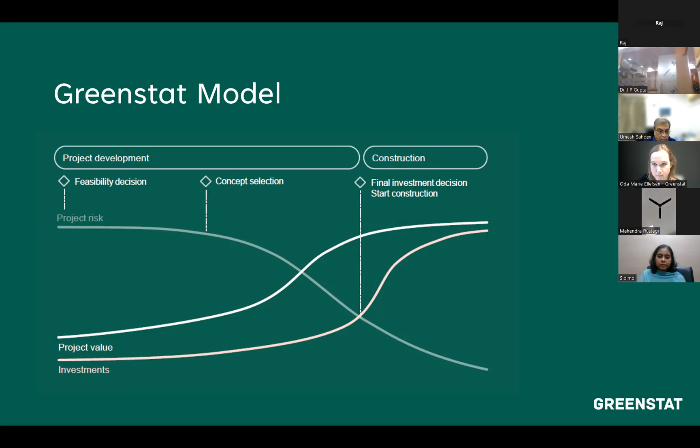So this is the model that we work with, and we have a project development cycle, which is divided in different stages that we go through.

And obviously the first stage is the feasibility study that we can do for our own projects, and we can do for others,

depending on the project. So each project phase is ended with a decision gate, essentially, where we try to identify the highest risk and decide on whether to move on further.

So that's a brief intro, and then let's go right into what we require to build a green hydrogen project.

And in the simplest sort of form, all we need is water, renewable energy, an electrolyzer, and a hydrogen consumer. And the fundamentals need to be in place.

There's no way around it. We have to look at our renewable energy availability - we'll get back to that a little bit later. The type of energy source that we have. We have to look at our water availability and quality.

There's no way around it. If you're going to produce hydrogen through electrolysis, you're going to need water and electricity.

And then we have to look at the different options for electrolysis. So that's the technology, the efficiency that we get, what kind of maturity the technology has, the reliability,

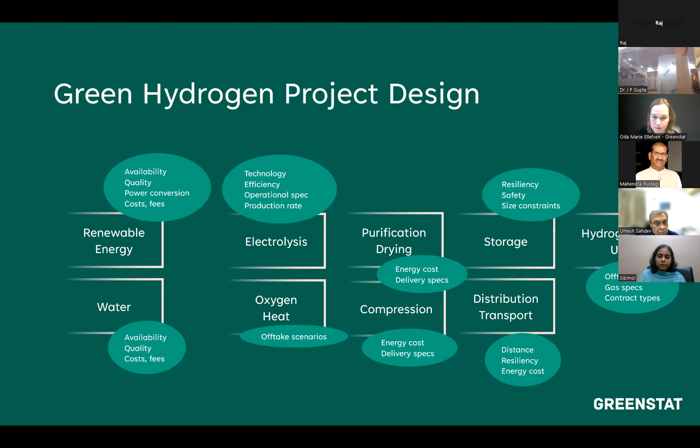So this is just an overview, and I want to spend some time on this because it's often not discussed, because we often think of the hydrogen plant as only an electrolyzer, and I want to illustrate how many components are actually required to get a functional plant.

In addition to the electrolyzer system, we have the civil works, the buildings, lights, access roads, offices, and we need to balance the plant with water, nitrogen, compressors, storage, and we often have an overarching control system in the form of an energy management system that might also wrap up the renewable energy production if we're doing an integrated project.

And inside the electrolyzer system, we have the electrolyzer itself, which includes the stack, the balance of the stack, gas liquid separators and connectors. We have power electronics like rectifiers, transformers, and we have the balance of the system with gas and water purification, and the electrolyzer PLC or control system.

An industrial plant might actually have several stacks or electrolyzer units, or even full systems, because there are some benefits to having several smaller systems instead of one large one, especially if you're scaling up production from a small initial project phase until full-scale production comes in later. That's why you often see phase-wise build out, but that's obviously more costly because you have to balance the plant even when it's small. So it's important to keep in mind and important to understand if you're designing a hydrogen plant.

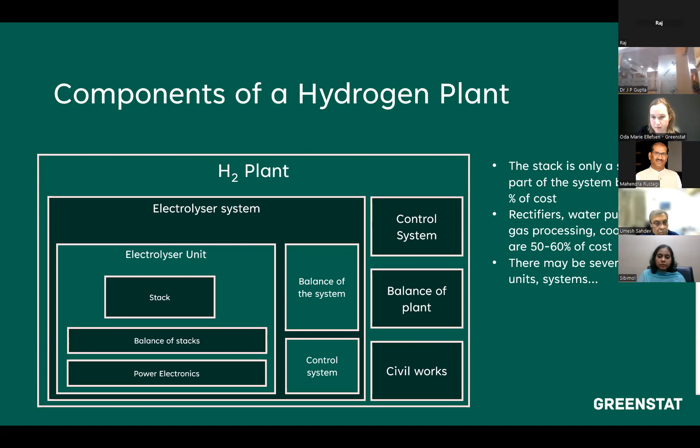I mentioned power availability, and especially in countries like India and Sri Lanka, I want to illustrate the difference between a project there versus a project in Norway. In Norway, we generally have renewable energy available through the grid. We have massive amounts of hydropower, which gives us renewable energy availability of 100%, essentially. That's more complicated than that, but that's what we operate with.

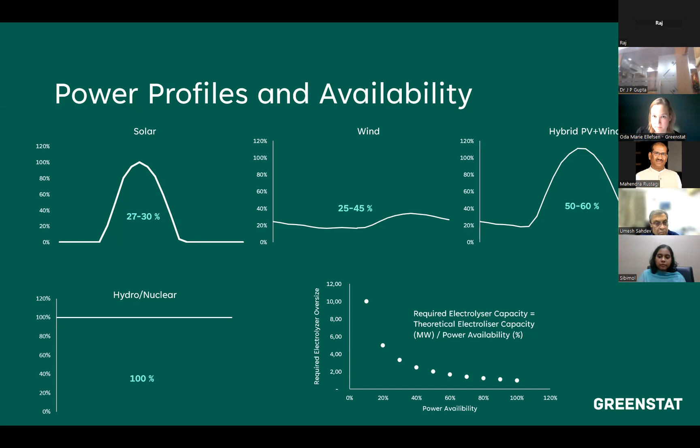However, if you're producing hydrogen from solar or wind or a hybrid plant, you have to consider what your availability will be, and that's going to dictate what your required electrolyzer capacity will be. Because when you don't have power, you don't produce. For solar, that's basically when the sun goes down until it comes back up again. For wind, it will vary greatly throughout the day, and if you combine the two, you might improve your availability, but it's a little bit more unpredictable. So this is going to be your main input for dimensioning your electrolyzer system. Just some rules of thumb.

You need 2.5 megawatts of electrolyzer to produce 1 ton per day of hydrogen if you have 100% renewable energy availability. So if you're going to produce 10 tons per day of hydrogen and you have 100% renewable energy availability, you need 25 megawatts of electrolyzer, in general. However, if you only have 25% available renewable energy during the day, you multiply that by 4. So essentially, your oversize factor is 1 divided by 25%, which is 4. And then you get 100 megawatts of electrolysis.

And you need to store the excess. If you're going to supply hydrogen at a constant flow rate, you're going to have to store your hydrogen, actually 8 tons of hydrogen, in order to supply at a constant rate. So this is a very simple calculation to estimate the size of your system.

Actually, the optimal solution in terms of cost might be a lot more complex. I'm not going to go into all the details, but a lot of our time is spent trying to dimension the renewable energy and the hydrogen production versus the demand, and how much you can fail on delivery in order to get your optimal cost of hydrogen.

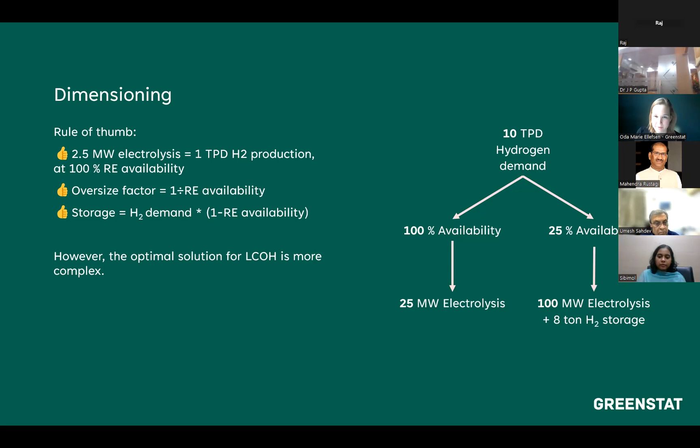And LCOH, I'll spend some time with that as well, because in a sea of acronyms, this might be one of the most important ones. LCOH stands for levelized cost of hydrogen, and it's a way of measuring the cost of producing hydrogen over the entire life cycle of the project, from the initial stage of production to where it's used. It takes into account all the expenses involved, the cost of setting up and operating the equipment, the cost of resources like electricity and water, and all the maintenance costs as well. So it's a way to give an understanding of the expenses involved in producing hydrogen, and it gives us the ability to compare with the cost of

other production methods. So here we see in the figure that the LCOH will vary according to the electricity price, obviously, because it's our main input, and also with the type of electrolyzer we choose. Currently, alkaline might be the cheapest. However, there are options to use SOEC, though it's not fully mature, and PEM is quite a bit more expensive. This also shows that the cost of these technologies is trending downwards. We are seeing some reduced cost, well, we will see some reduced cost on the capex side of the equation, which will give us a lower LCOH as we go into 2030, 2040, and 2050.

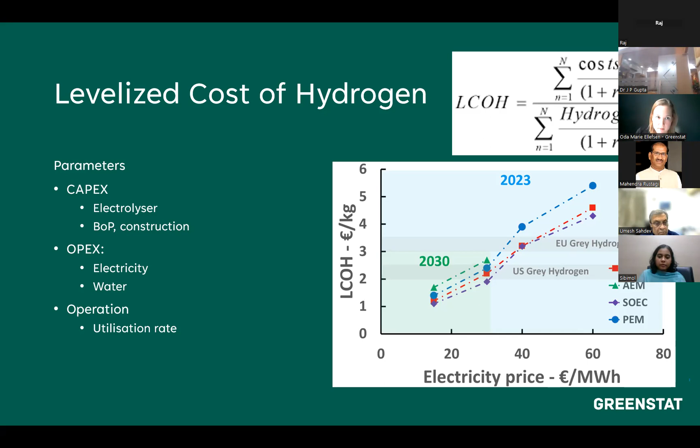This promise, this $1 per kilo in a decade, is something that's been mentioned both in the US and in India as a target for green hydrogen. I want to discuss this with you as probably a good target to have, if you think about the fact that green hydrogen is called to replace current uses of fossil hydrogen, mainly used in fertilizers and oil refining, but it's also a solution where electrification is difficult. That's steel production, long haul trucking, shipping, aviation, and there's quite a lot of debate on how much green hydrogen will actually be needed. But that's more complicated to discuss here.

What we really need to do is try and compare the cost of green hydrogen compared to the cost of gray hydrogen, and that can vary depending on where in the world you are. In the US and in China, fossil hydrogen might cost about $1.5 per kilo, and in Europe it might be closer to $2.5 per kilo. It depends on the cost of natural gas, and it's not a constant number.

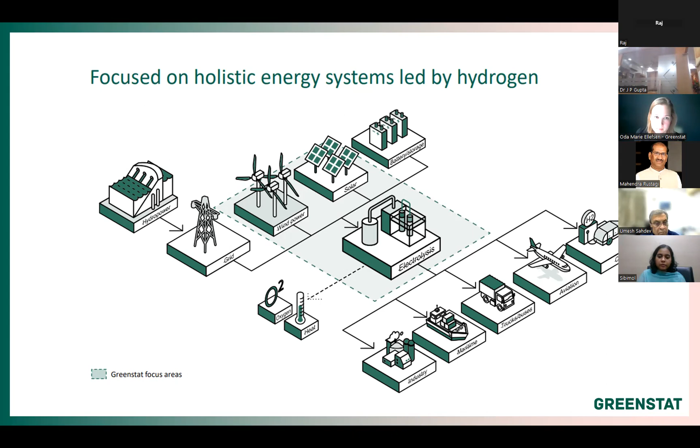I'll show you how that works here. So I chose three projects that I think are interesting enough and different enough for you to get an idea of the different solutions and different scenarios that we work with. And these are all from Norway.

First up is Stord Hydrogen. It's a small pilot plant, which is grid connected, and it's in operation. It started operation in May this year, and it can produce about 400 kilos of hydrogen per day. It is operated and majority owned by HYDS, Hydrogen Solutions, and Greenstat and Altec are co-owners. We were part of designing and developing this project. The hydrogen here is produced and supplied to the next door neighbor, which is the Sustainable Energy Catapult Center. They test different fuel cells and different hydrogen engines that we've discussed for research purposes and for different clients in Norway. We can also supply compressed hydrogen in containers, to basically any application, but generally the maritime, construction, energy, or transport sector. So that's Stord Hydrogen, and it's in operation. It's working. So we're proud to talk about this.

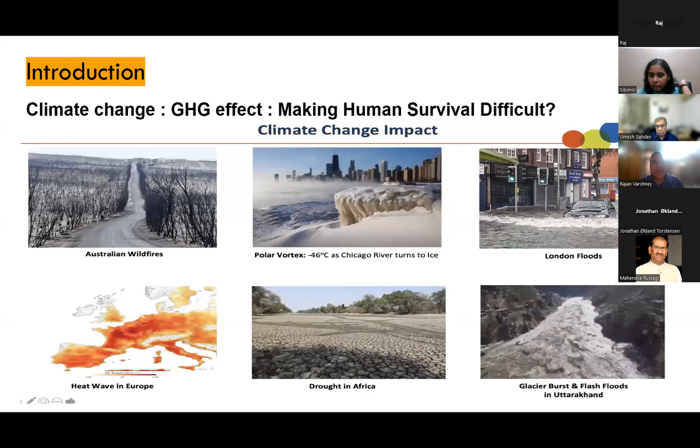Some issues or counter effects may be there. So if we use waste towards production of hydrogen, or even if we do electrolysis, we do certain innovations to reduce the GHG emission and use the heat value. This is the basic premise, slightly different from what you've heard till now. I am covering this area, mainly concentrating on hydrogen from waste and other newer techniques. We all know the GHG effects are very disturbing for India.

Our top 15 cities out of the world's top 20 polluted cities are there. If we don't use this opportunity, when India and Sri Lanka have a lot of development to take place in the next 30, 40, 50 years -- whatever we have done is hardly 10% of the capacities we require later -- so if we change our methods towards cleaner energy usage and cleaner production methods, it is a great opportunity.

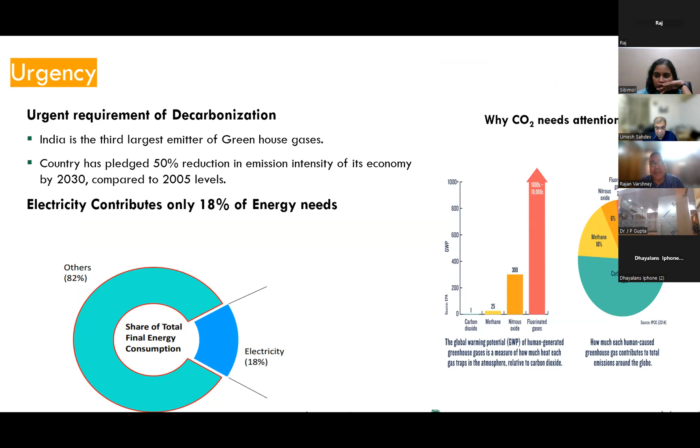Not only electricity, but fuel, transportation, and feedstocks all have to be changed, because electricity contributes only 18% of the energy need. Even if you make it totally green, a lot of other things are still to be made green. But waste is already accumulated in our landfill sites across the world, and people are worried how to control and eliminate it. Hydrogen presents a very good opportunity that I am covering now.

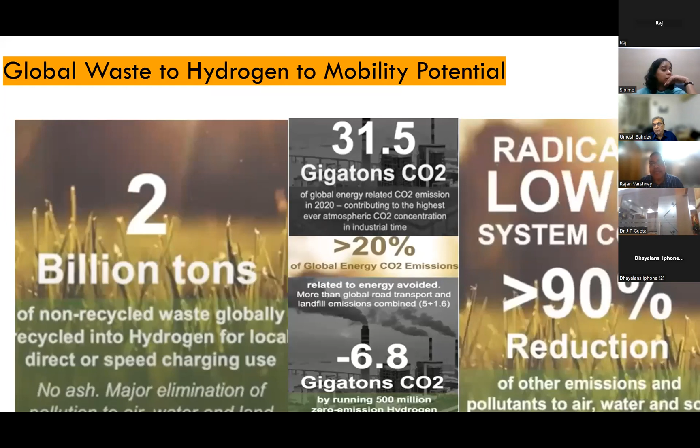We can even use agroforestry, Napier grass, and other things which can be grown in areas that are not fertile or don't have much water. Plus, if we use this biomass as well as agro waste, municipal solid waste, animal dung, sludge, sewage sludge, poultry waste, agroforestry -- there is a tremendous amount of waste available and we have to use it.

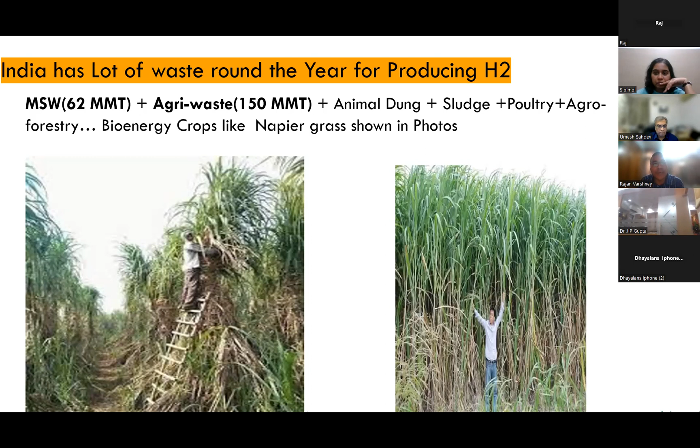We have seen in the Tokyo Olympics, China Winter Olympics, and further coming games, that a lot of hydrogen usage is there -- vehicles, cooking, heating, cooling, everything can be done. Electricity can be done through hydrogen.

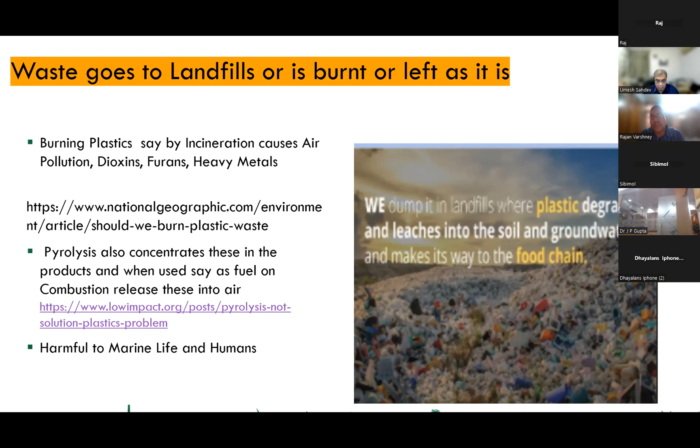Burning waste or leaving it as it is not an alternative, because if you leave the waste as it is, it liberates methane, which is 84 times more potent than CO2 as a GHG gas. So we have to rather utilize that methane and convert it into hydrogen, or use it as methane itself, but somehow convert it to CO2, which is much less potent, or even capture that CO2 which gets produced and make it into other fuels by reacting with hydrogen produced by us.

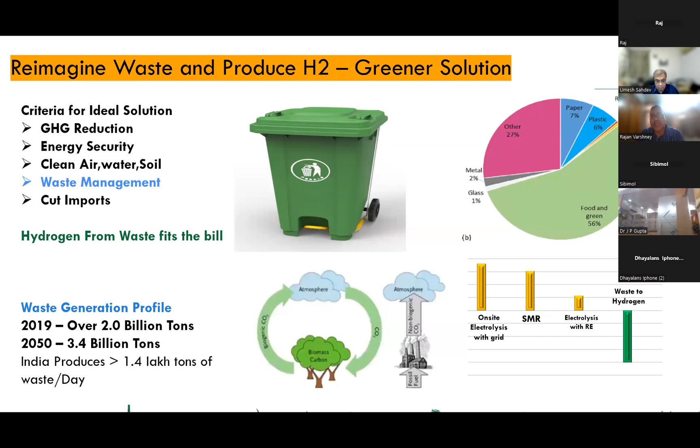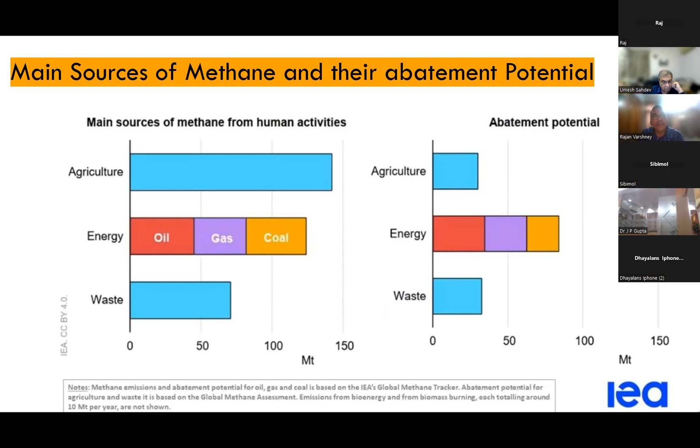Various companies across the world have different technologies, some with small plants, some with big plants. Like Pennsaco, USA, has a small decentralized hydrogen production plant. TRI USA has a 500 TPD biomass processing plant that converts it into SAF. It first converts it to syngas, then can convert it to anything -- SAF will be produced shortly, and hydrogen syngas can be used to make hydrogen easily. Several other companies are there which I have listed.

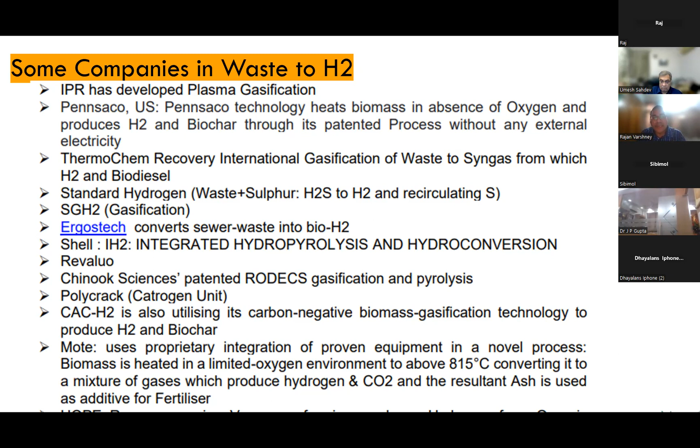The advantage of this Pennsaco pyrolysis process is that it generates biochar. If we mix this biochar into the soil, we can really further suck more CO2 from the atmosphere, and the process is highly carbon negative. First, we have produced hydrogen, which is saving us GHG emissions. Then this biochar, as a soil amendment, helps in absorbing carbon, and moreover soil fertility increases, so less amount of fertilizers are required. Fertilizers again require ammonia, and ammonia requires nitrogen and hydrogen.

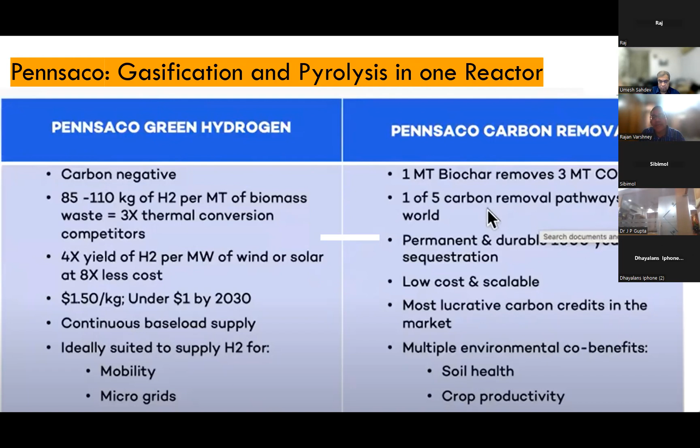So there is a lot of synergy. If we use waste properly, we can reduce our energy requirements ultimately, and the requirement for using fertilizers for production.

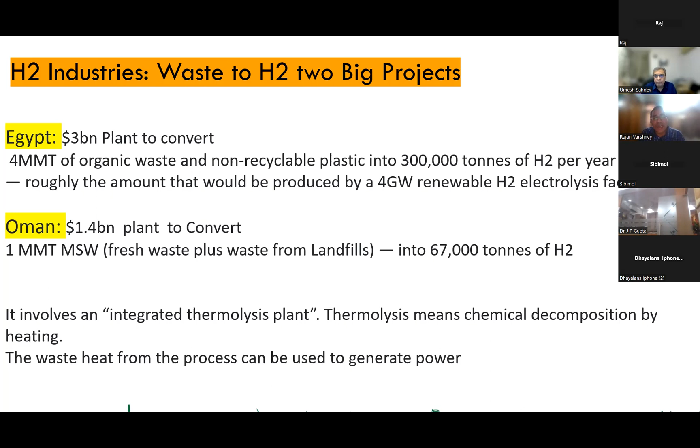Similarly, many companies are like H2 Industries, having a 3 billion dollar plant for converting 4 MMT of organic waste and plastics into hydrogen. Oman has a plant of H2 Industries for 1 MMT MSW input. They use integrated thermolysis. Then SGH2 has a plant with plasma gasification.

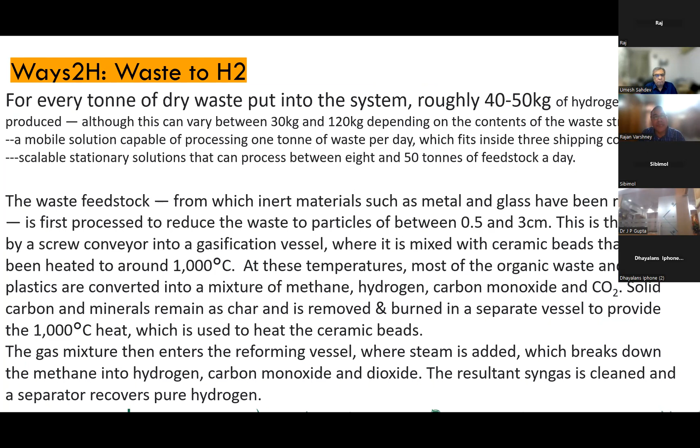Ways2H is again having a technology, and they have collaborated in India also with one company.

Then Waste2HHO, this is like we are converting water into brown gas. This HHO is called brown gas. Instead of making hydrogen, which takes in a lot of electricity, here very little electricity is required and a lot more energy is produced.

This is an example of an Indian company where glass is produced in Bharuch, Gujarat. They have reduced their natural gas consumption by 14%, and whatever addition they did very recently was done around the first quarter of this May only.

Only 6 months have passed, and expected ROI is 24 months. Brown gas has better combustion efficiency and aids more complete fuel consumption, so emissions are reduced. If we compare, for 1 kilowatt hour of electricity around 860 kilocalories of heat, we are getting HHO, which is giving us 50,000 kilocalories of corresponding fuel.

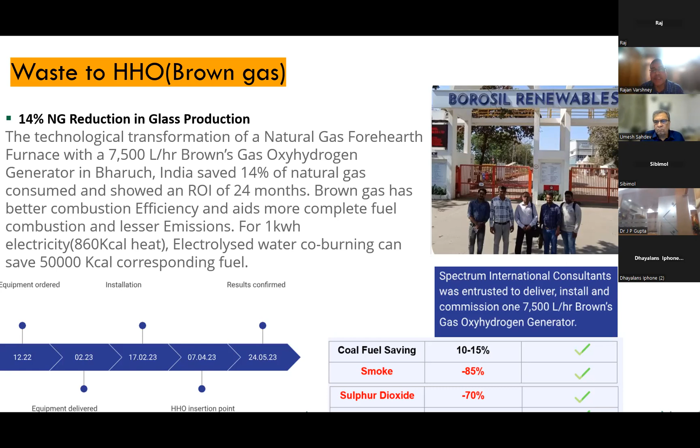They employed Spectrum International consultants to deliver this system, and the fuel saving was 15%, smoke reduction 85%, sulfur dioxide reduction 70%. So we have to use technology in such a way that we reduce our fuel consumption and simultaneously reduce our emissions.

When brown gas is consumed, it is like HHO - protium, like an electron is taken into the valence shell of oxygen from the hydrogen. It has 2 hydrogen atoms, so it becomes protons, and the electron goes into an oxygen shell. So when it gets combined into hydrogen again, into water again, a lot of energy is released.

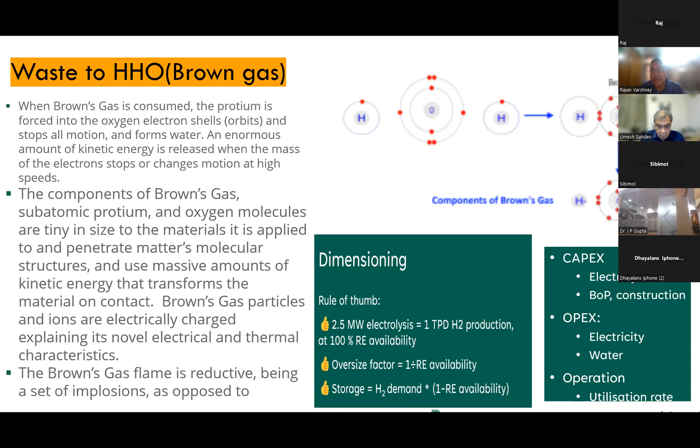With respect to electrolyzers, there is a lot of capex, opex, and their CUF. If we use renewable electricity, which is available only around 20-30% of the time of the day, a lot more electrolyzer capacity can be saved if we use waste or use innovative techniques.

In electrolyzers also, new electrolyzers are coming up, like Advanced Ionics having a Symbiotic electrolyzer, which will use 35 kilowatt hours of energy for 1 kg of hydrogen. That is 35 units of electricity for 1 kg of hydrogen.

It is using an SOEC process, the same that Bloom is using, but Bloom is at a high temperature. This has a temperature of hardly 150 degrees centigrade, so it requires lesser electricity also. This is the advantage here.

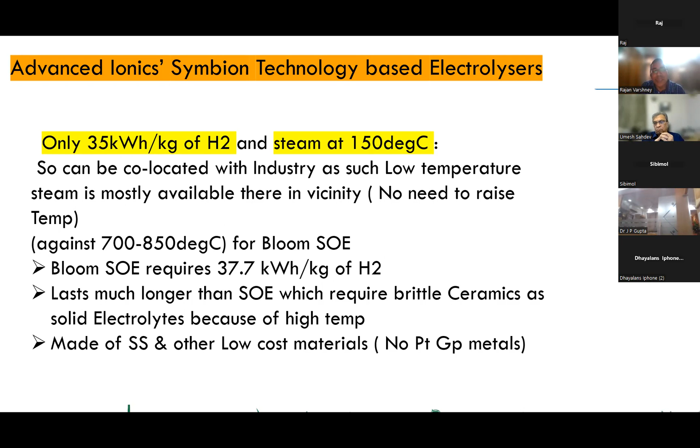And it doesn't use any platinum group metals. Mostly it is made of stainless steel and low cost materials. It doesn't use ceramic also.

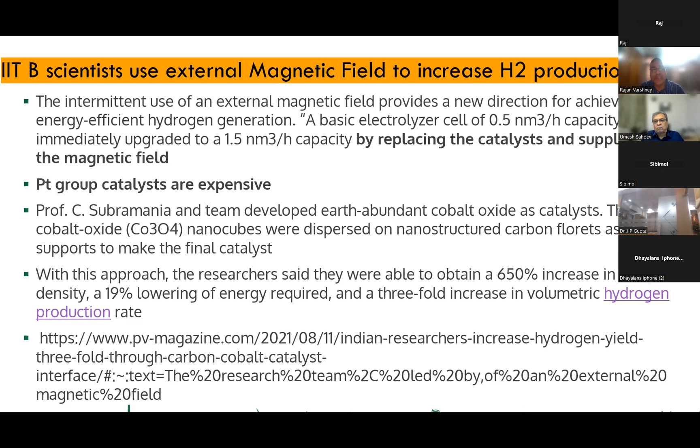Similarly, IIT Bombay scientists have used external magnetism to reduce electricity consumption and thereby increase hydrogen production.

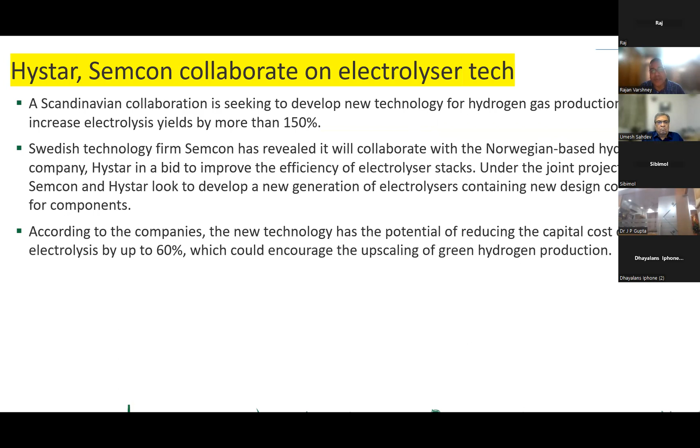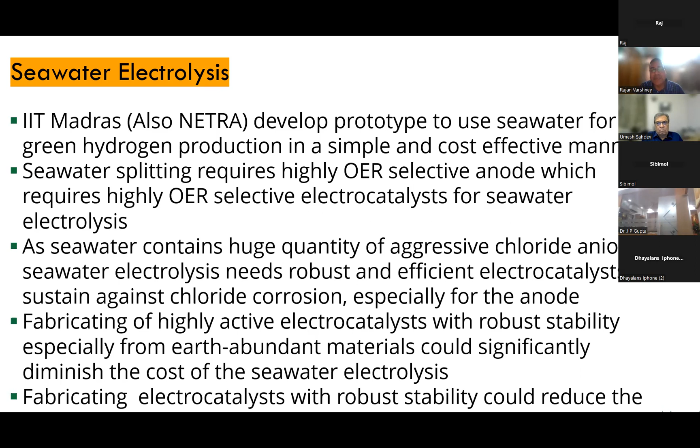Then there are methods to use seawater or even sewage water. AEM electrolyzers don't use platinum group metals. They can be easily made robust to use this water directly.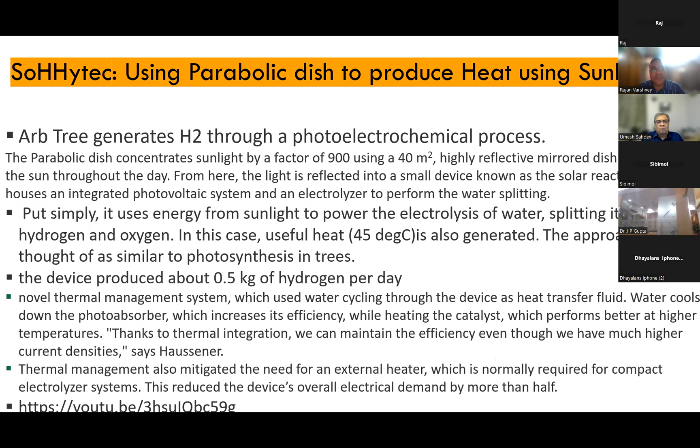Then SoHHytec is a European company which has an electrolyzer inbuilt in a big dish. This is a Swiss-based company, and they are building electrolyzers which are called big dish.

They have a system in which the CPV, called concentrated PV, converts electricity at very high temperature, but it has very high efficiency.

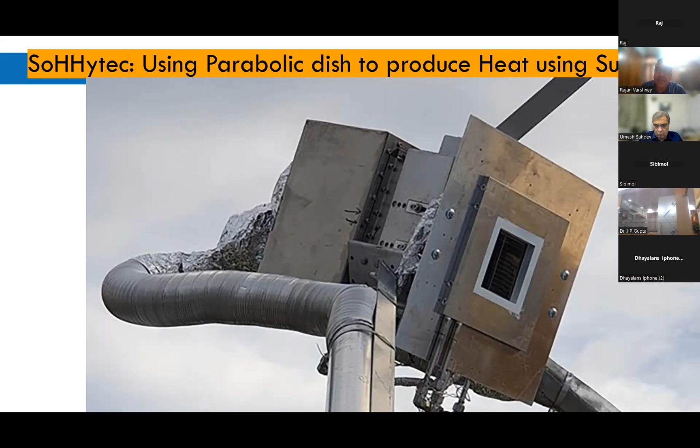So what they do is they just put hydrogen in one pipe, oxygen comes through the second pipe, and hydrogen is the main useful thing which is coming out after the electrolysis. The electrolyzer and CPV - CPV is converting that light into electricity, and hydrogen is just at the back of it. The electrolyzer is just at the back of it.

Then the advantage is this system can generate a temperature through the sun only, a reflection through mirrors in the big dish, and the temperature can go up to 1500 degrees centigrade.

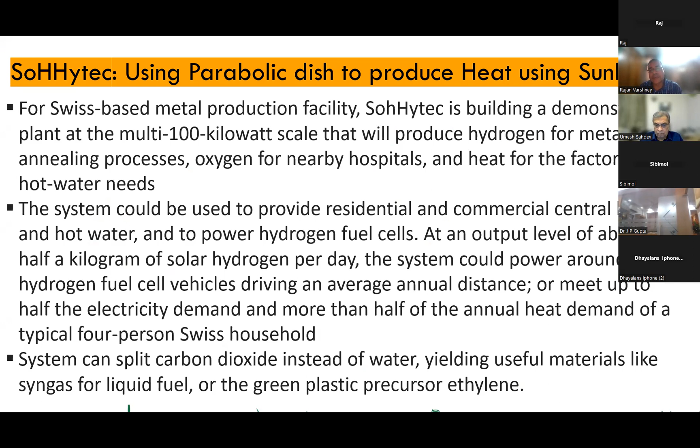So what happens is we can use this temperature for direct photocatalytic splitting of water also to make hydrogen, and also this can be used for other solar fuels also.

Then we have CSP plus storage. This is called concentrating solar power plus molten salt storage. We use the sun's heat to produce electricity ultimately.

But what we do is we put these heliostats or mirrors, and a receiver is there. These mirrors act as reflectors and reflect sunlight into the receiver, and a lot of heat is generated, maybe around 700 degrees centigrade or 500 degrees centigrade, depending on how much you design it and what is your heat transfer medium.

If we use molten salt, we keep this temperature around 550 degrees centigrade and use a heat exchanger to transfer heat from the molten salt to the water, and water converts into steam and runs the turbine, giving us 24/7 renewable power, firm baseload power without any intermittency.

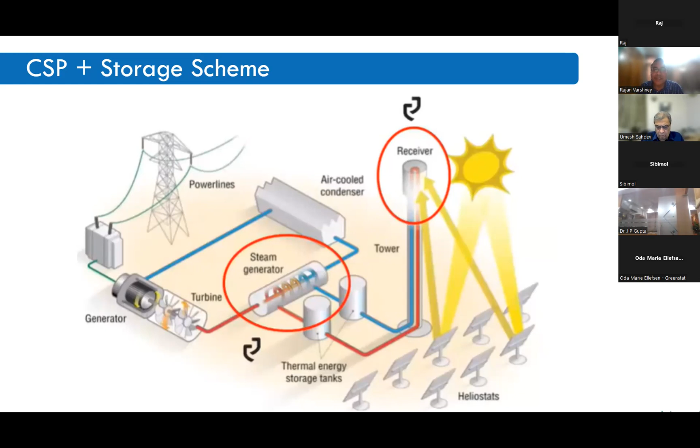So this electricity, if we use with electrolyzers, we can have electrolyzer utilization factor of 100%, so overall cost of hydrogen becomes 2/3. And these technologies can be used for carbon capture also, because if a coal-based thermal plant is there, it is generating CO2 24 hours, and if we use this renewable electricity to catch this CO2, we are much better off.

Similarly, biofuels can be made through this 24/7 renewable electricity, firm electricity.

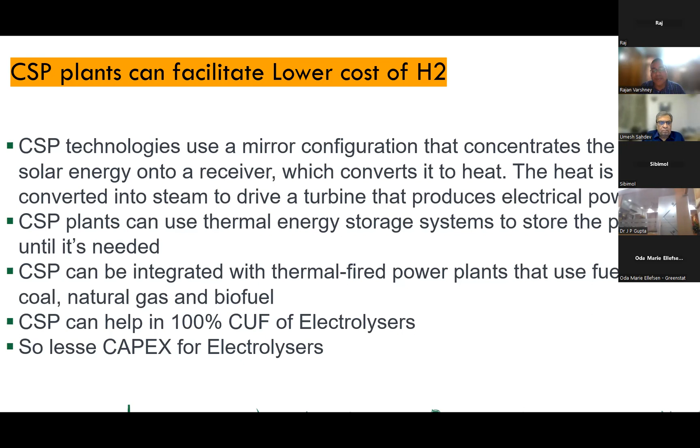Now towards the utilization of waste, mainly I have given you only some typical examples. Basic processes you have already understood during the earlier presentations. Basically, if it is wet waste or a mixed waste, you segregate wet waste out of it and do anaerobic digestion.

Then you do steam methane reforming, or second process is methane pyrolysis, which I'll give you some examples of also. Then instead of segregating, we can always take the mixed waste and use gasification to produce syngas, and from syngas we can make anything. It is a basic thing, and a lot of petroleum extraction can be saved.

Then plasma gasification, like I had shown, one SGH2 company. Then pyrolysis - it's low temperature and partial oxygen presence, so we can pyrolyze the waste also.

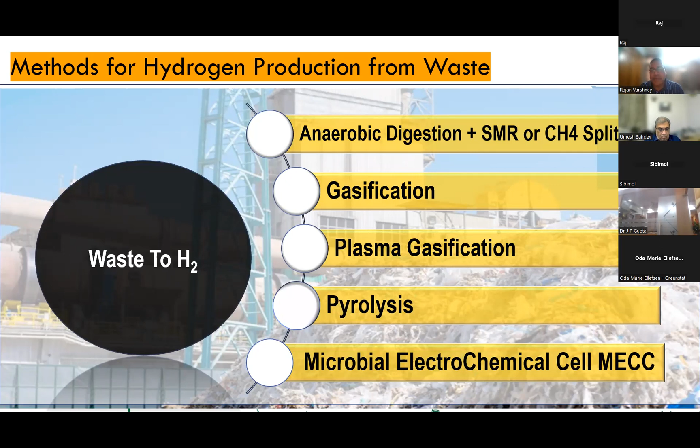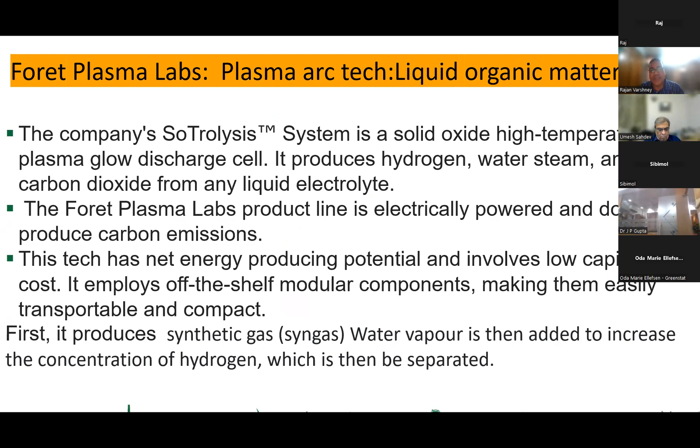Then newer technologies based on microbial things are also coming up. This is a Foret Plasma lab which has a zero-emission company technology, which is again a plasma-based thing, and they produce syngas out of it, and from that we can segregate hydrogen through membranes.

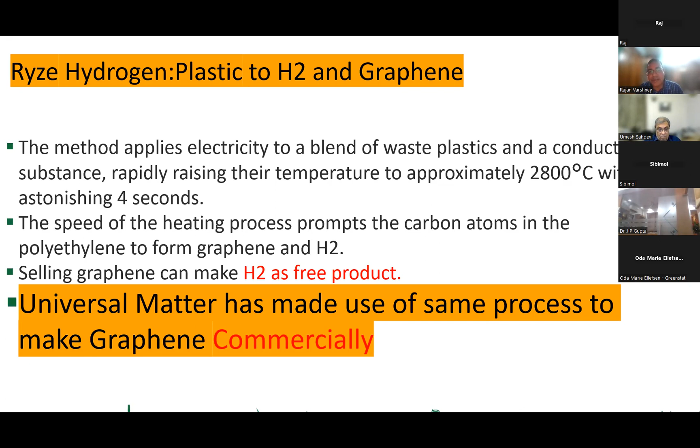Then Ryze Hydrogen is there - it converts plastic to hydrogen and graphene. So this is something like methane pyrolysis, and we are getting a very costly byproduct out of it, which is 5,000 rupees per kg. One company, Universal Matter, is already doing it. Another company, Levidian, in UK, is also doing it.

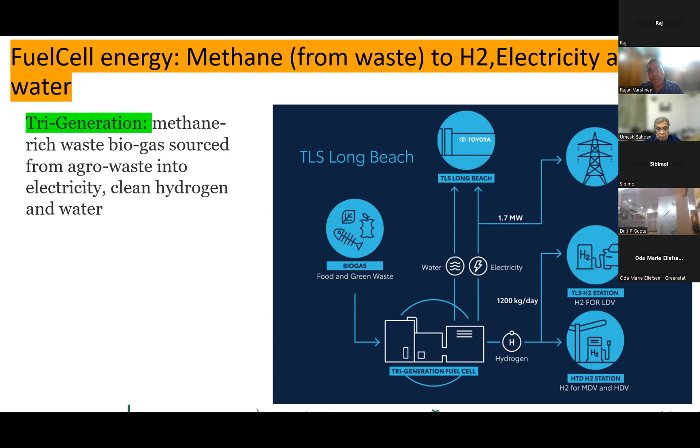Then there are other methods also. This is a tri-generation fuel cell. It gets biogas from the anaerobic digestion of the wet waste and converts it into electricity, hydrogen, and water. They have a patented process. This is an example of the plant.

Then many big companies are also coming up fast, and this Toyota has a plan to convert waste to hydrogen by 2025.

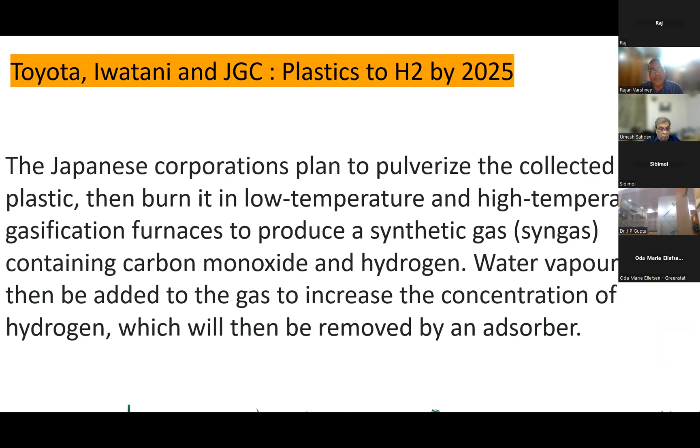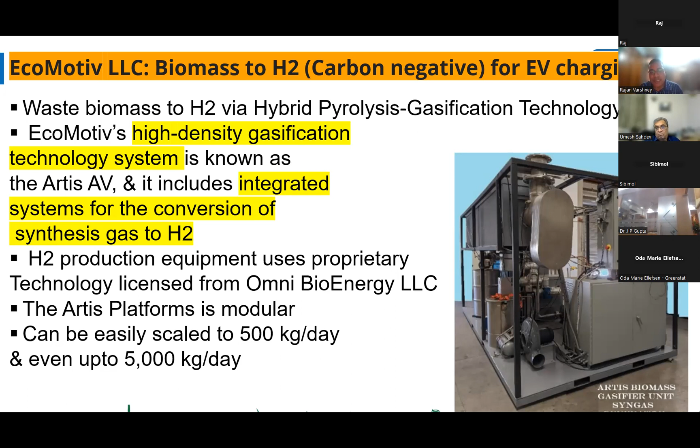Then this is another company which has a hybrid pyrolysis gasification technology, and they call it EcoMotiv. They do high density gasification, and they have an integrated system to segregate hydrogen out of the syngas produced, and they can do it from 500 kg per day capacity to even 5,000 kg per day through this platform only.

And the advantages in the table, we can see that the net water usage is 1/3, net electricity consumption is 1/5 or 1/6 even, and all this makes it hydrogen cost below $1.

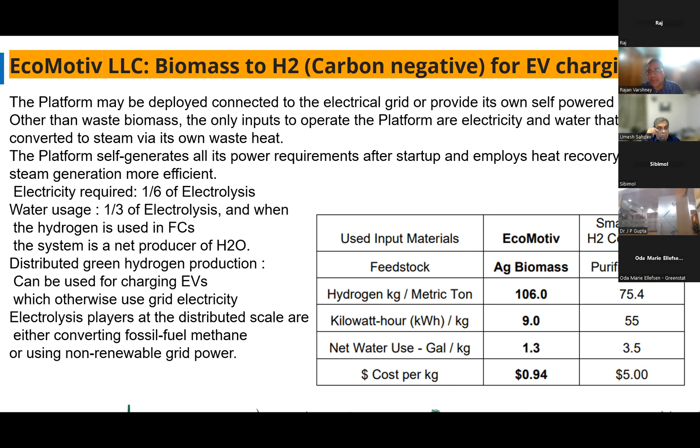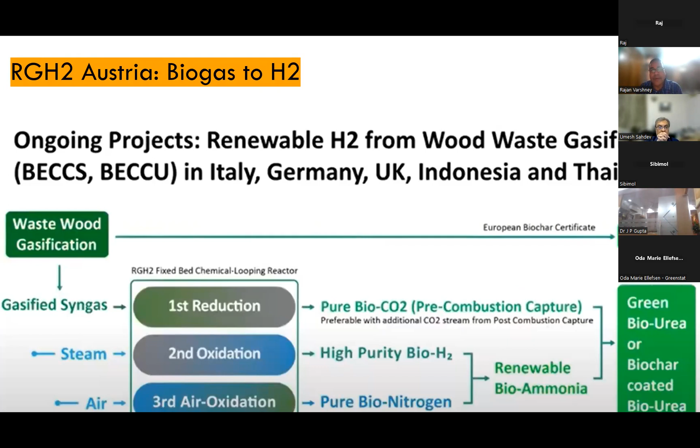Then this anaerobic digestion - the basic thing is with the waste, we can do decentralized hydrogen production, and the advantage is that transportation cost is reduced, the storage cost is reduced, if we can produce hydrogen near the point of use and in the right quantities.

Many vendors are using SMR - they have a small SMR. This BayoTech USA has it, HyGear has it, and many other companies are having such small systems. They can produce hydrogen in your backyard or on your roof also.

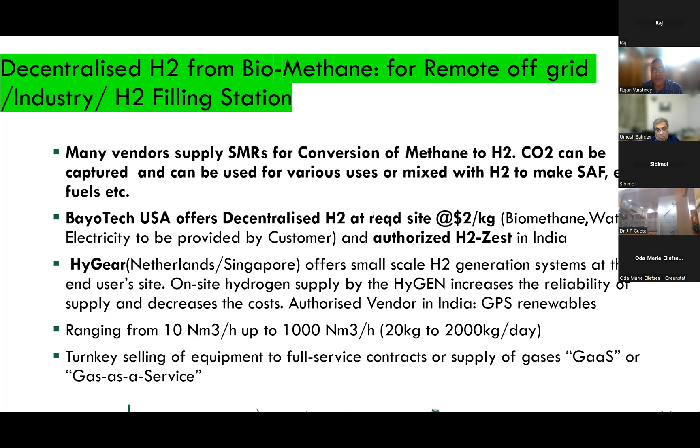Then, in that, we have to capture hydrogen if we use SMR. Sorry, we have to capture CO2 also to reduce the CO2 emission production. That is much better. Otherwise, with the 1 kg of hydrogen production, there is about 9 kg of CO2 production.

Although that is a biogenic production, because the biomass took in that CO2 during its growth in last, say, 3-4 months or 3-4 years, whatever ages, that same CO2 is getting liberated. So net CO2 is same, but we can also capture that, but that requires energy. And there is a method of not even requiring capture of CO2, making the whole process highly carbon negative. This is called methane pyrolysis or methane splitting.

Here, hydrogen and solid carbon is produced. Solid carbon can be in the form of carbon black, which is used in tires, plastics, or in dyes. It can be in carbon nanotubes, it can be in graphene form, it can be in fullerene form, it can be in carbon nano-onion form, or biochar, or artificial diamond, or graphite, which is used in electrodes also, in pencil lead also.

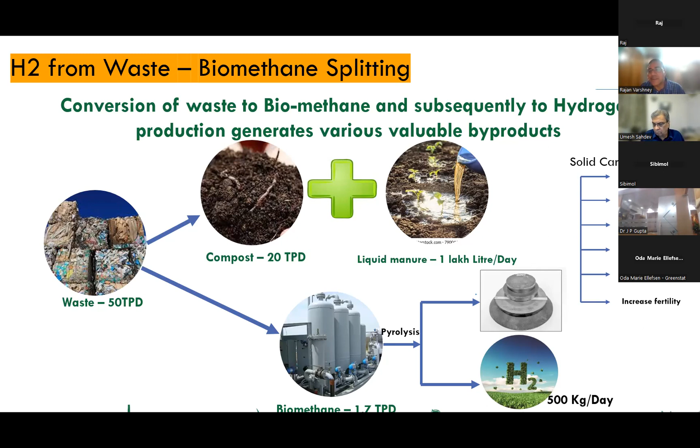Similarly, these carbon nanotubes, graphite, graphene, all these things, some of these are very costly. Graphene is costing around 5,000 rupees per kg and is a very versatile product. Fullerene costs around 10,000 rupees per kg. So if we sell these products, we can get hydrogen nearly free of cost. So $1 is nothing, we can have it nearly free.

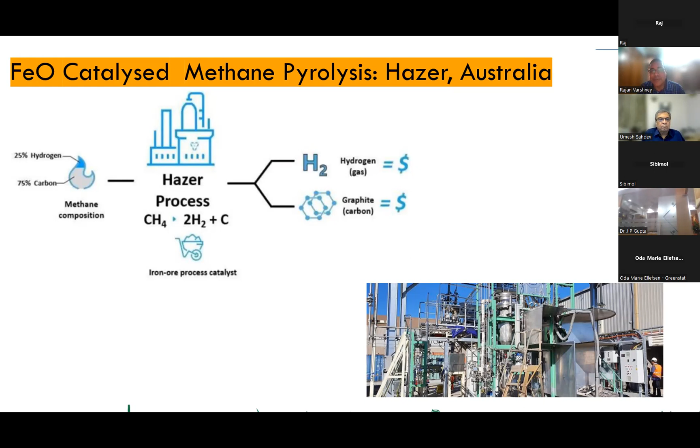Big companies are already doing it. Plasma methane pyrolysis is being done by this company, Monolith USA. They are having a second plant also, making it a commercial plant. This is Hazer, Australia. They have recently commissioned their plant. They have a slightly different technology, but it is also methane pyrolysis. Then some other companies are doing it.

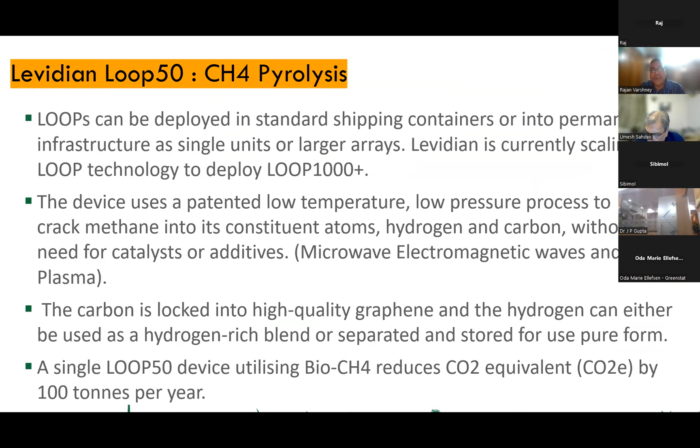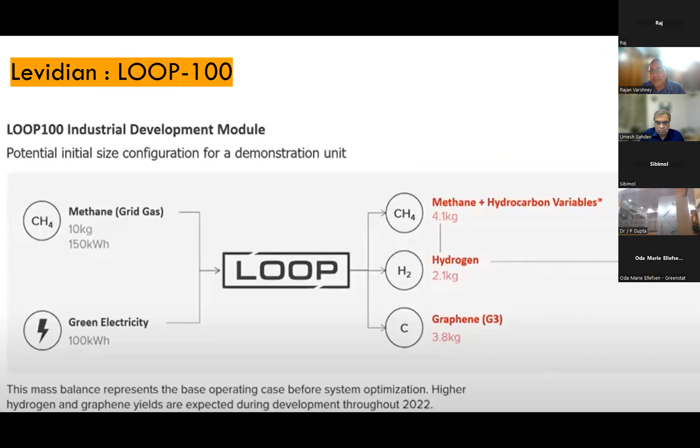Then this Levidian, which I earlier mentioned, also does methane pyrolysis. They call it Loop, and they convert methane - it can be from any source, but if it is from biomethane, like from waste, it is much better - into graphene and hydrogen.

This is an Indian company, Pagnism Innovations. They have a Rudra reactor, which converts methane into graphene and hydrogen.

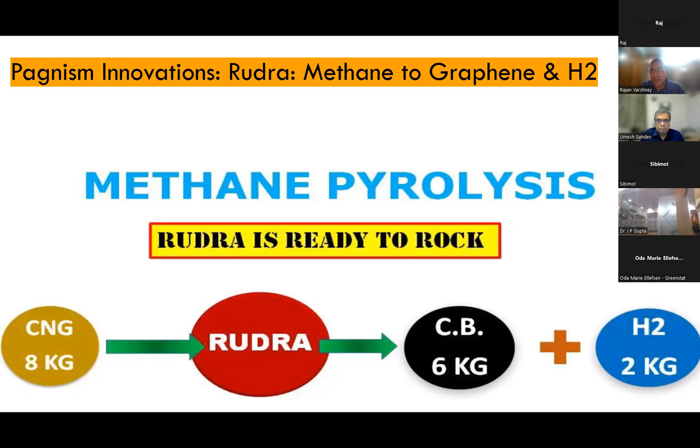Then there are other companies like IOC and IISc Bangalore who are scaling up a technology for biomass gasification. Sentient Labs, which is a unit of KPIT research, is also working on it. Thermex is working on it. Institute for Plasma Research has developed gasification technology.

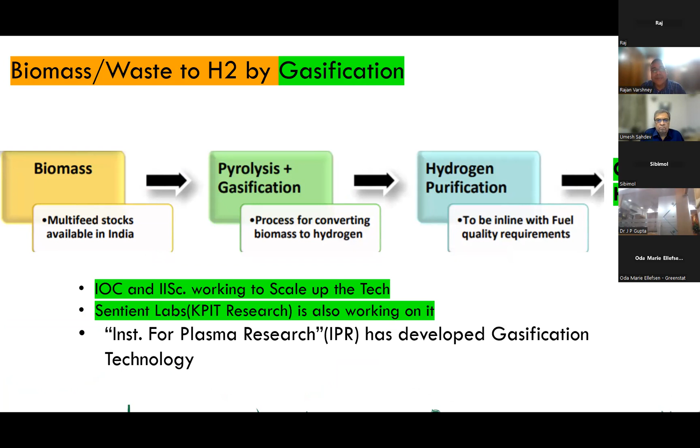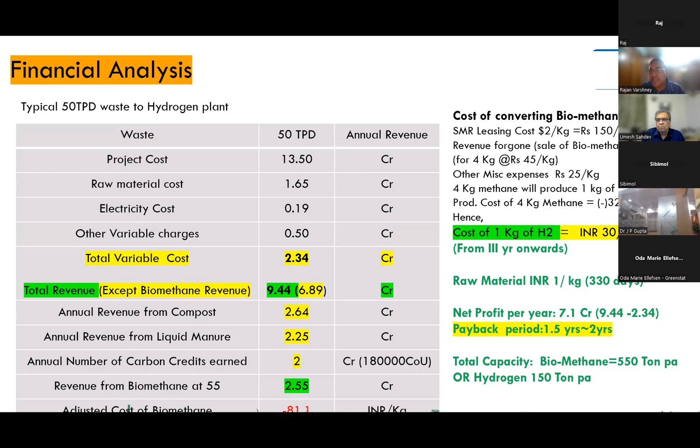If we see wet waste to biomethane and then biomethane to hydrogen, it gives us hydrogen at very competitive rates, even less than 100 rupees per kg. It depends on how much carbon credits you can earn in the process, and what the rate of one carbon credit is. At times it becomes very high, so we have to accumulate the carbon credits and sell them when the rate is high.

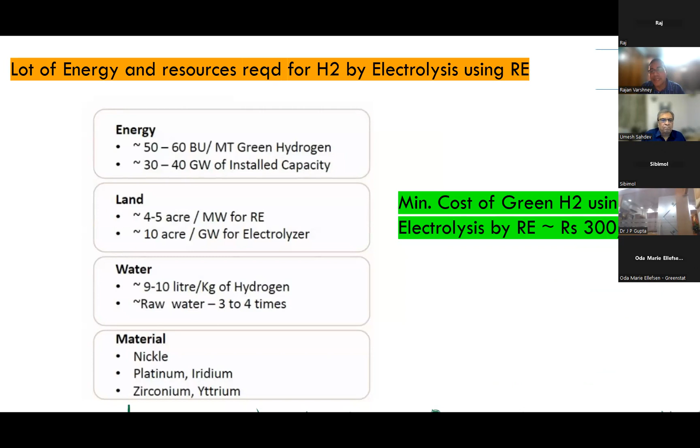If we use electrolysis with PV and other renewable energy sources, a lot of land is required, a lot of energy is required, a lot of water, and costly materials like nickel, platinum, iridium, etc. are required. So if we go through this route, waste to hydrogen, we can make it more GHG emission free, and at times even carbon negative, at a cheaper cost, while simultaneously protecting our soil, water, etc.

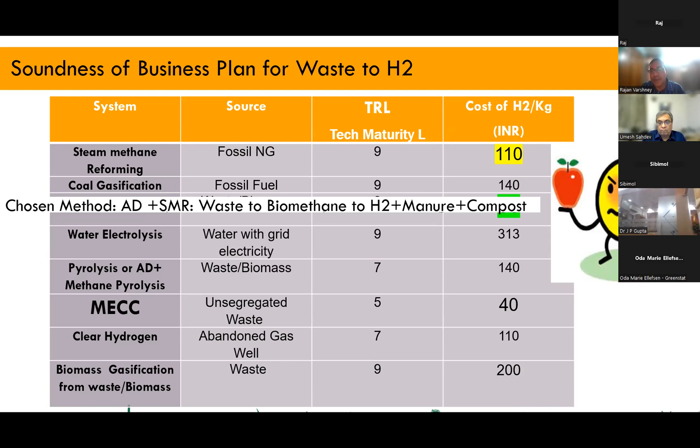This microbial route is a very good route, but it is at TRL 4-5 levels, 6 maximum. Different companies are doing it. Here you don't even need electricity - the microbes themselves produce enzymes, and these enzymes disintegrate waste into useful products, which can be hydrogen, methane, methanol, ethanol, carbonates, bicarbonates, sulfates.

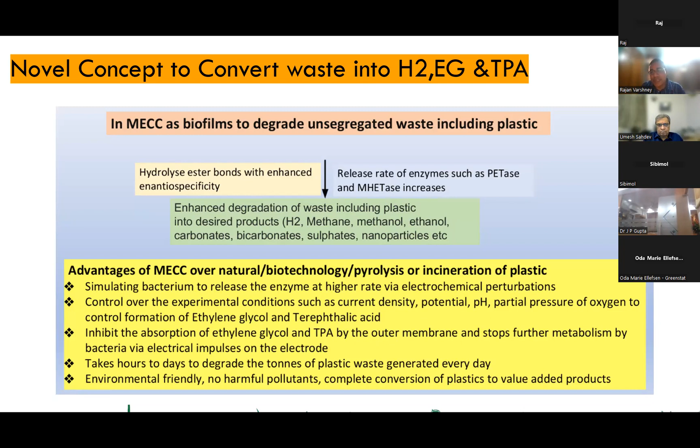Some of the products can be converted into a form that can be sold at a very high rate. Like if we make ethylene glycol and terephthalic acid, then sodium terephthalate - sodium terephthalate sells at more than 50,000 rupees per kg. So again, although the process is cheap, the reactor is cheap, and the microbes are themselves replicating, all these costs are very cheap, and moreover the byproducts can be very costly.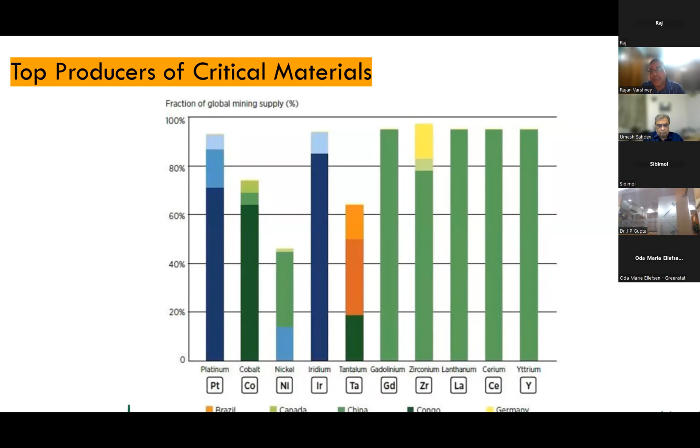So we can produce hydrogen at a very low rate and reduce or even eliminate the need for platinum group metals or rare earths, which are in any case not available in India and Sri Lanka, and otherwise would have to be imported. Moreover, these hydrogen technologies, as compared to BEV battery electric technologies, use very little of these costly materials like platinum group metals and rare earths.

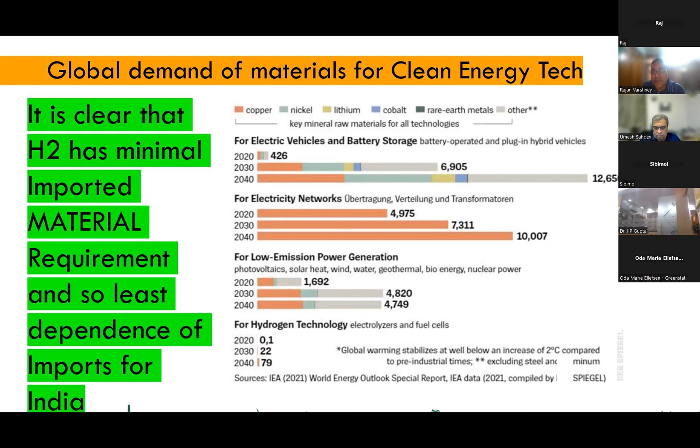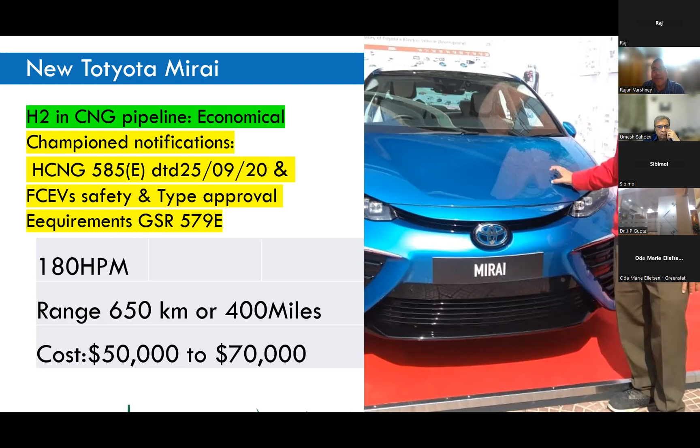In India also, hydrogen vehicles have been launched, and the notifications - I got these notifications done - for FCEV safety and type test approval. This is GSR 579E, and HCNG and hydrogen as a permitted fuel is 585E. And the best part is these cars run 650 kilometers on 5 kg. So if hydrogen is say 100 rupees per kg, the running cost is hardly 1 rupee per km. This is Gadkari ji launching the Toyota Mirai on 16 March.

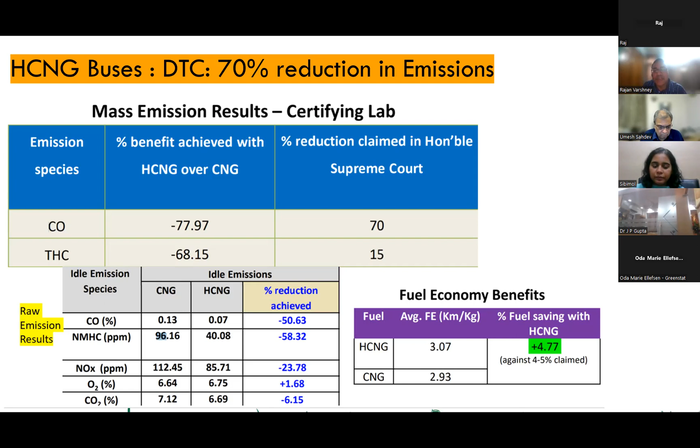Even HCNG, hydrogen blended in CNG, reduces pollution. When that notification was done on 25th September 2020, from 1st October 2020, 50 buses were run on HCNG DTC buses in Delhi, and the pollution emissions were much lower. CO was reduced 70%, total hydrocarbon content was reduced 70%, and the efficiency of HCNG is 5% more. SPM level decreases tremendously because hydrogen ultimately produces steam, and that steam doesn't allow smaller particles to fly out.

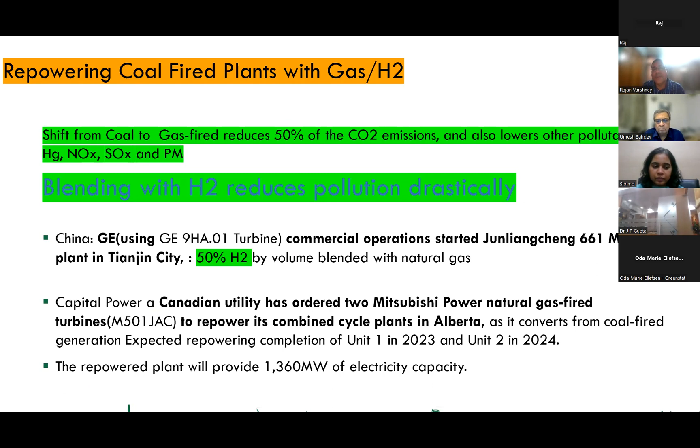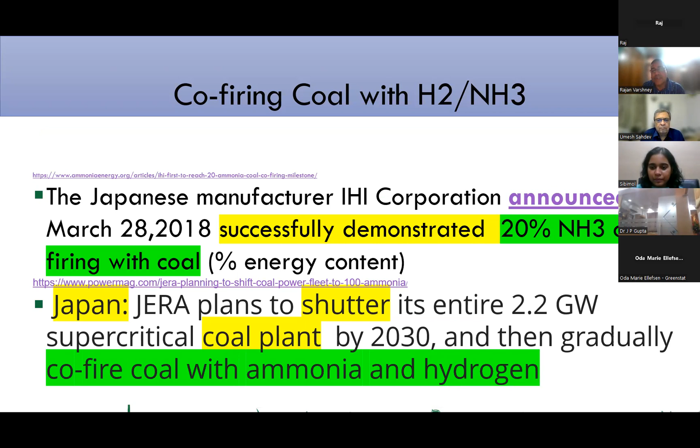This hydrogen can be used for co-firing in coal-fired power plants, or even for ammonia co-firing. So all this can reduce pollution even if we have to use coal. But what I have shown you is CSP plus molten salt storage that can replace baseload power from coal very well.

Some plants are replaced. I'm really sorry to interrupt you—would you be able to wind up in another two minutes? Yes, yes. Okay, thank you.

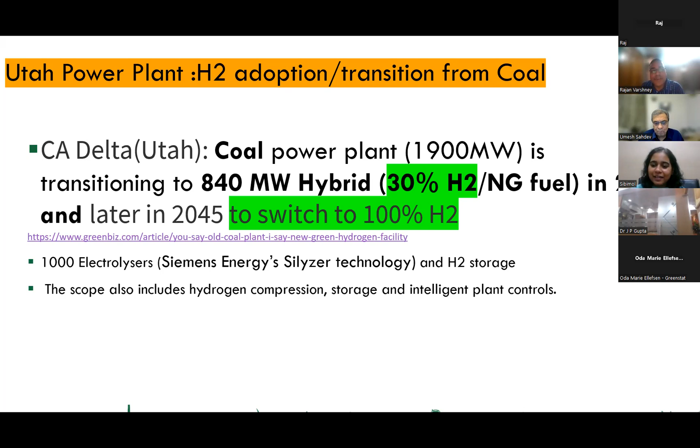Some policy interventions are required, like carbon intensity should be measured instead of just saying green hydrogen. We have defined the carbon intensity of green hydrogen in India as 2 kg CO2 equivalent of non-biogenic resources per kg of hydrogen produced.

Similarly, pilots should be funded, so more companies will come up and scale up these things, and the whole hydrogen economy will develop in the next 2, 3, 4 years.

Then carbon market regulation should be brought in fast. It indirectly helps subsidize the cost of hydrogen production and ultimately leads to penalties for GHG emitting industries. Then policies supporting decentralized waste-to-hydrogen production should be promoted.

This should be notified, reducing transportation cost of hydrogen, as it can be produced near the vehicle or tractor, wherever waste is available and population is there. And just like RE, banking of biomethane should also be there, with injection anywhere—just like electricity, you inject into the grid and draw it from anywhere. A similar policy should exist for this.

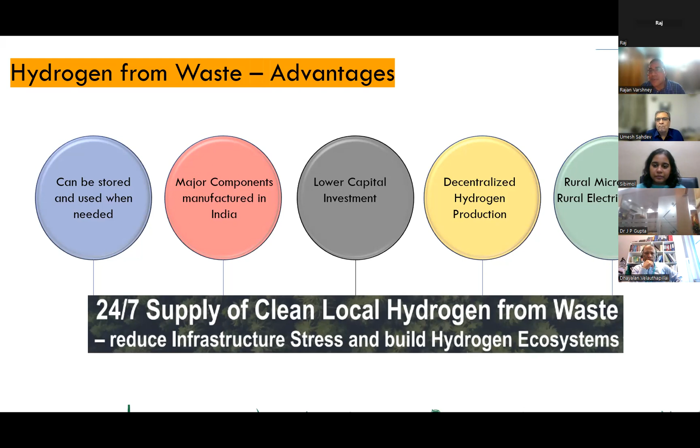Hydrogen from waste can be stored, and waste can also be easily stored, so when needed, hydrogen can be produced. Major components are locally manufactured, capital investment is lower, and decentralized hydrogen production helps cut down transportation cost. Rural microgrids and rural electrification can be done easily.

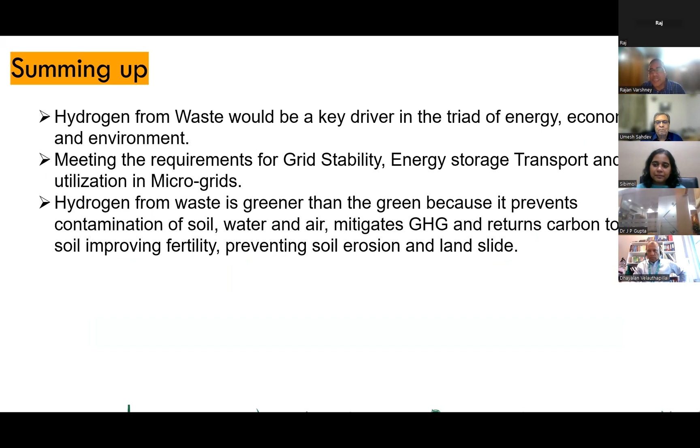So it is a key driver towards energy and environment, grid stability, and it is much greener than so-called green hydrogen, addressing various SDG goals directly or indirectly. So in conclusion, I can say that waste to hydrogen is greener than green.

Green hydrogen is a multi-decade opportunity. Green hydrogen can integrate renewable energy sustainably and thus provide energy across sectors. Various sectors can be decarbonized.

Additional benefits include a cleaner environment, avoided methane flaring, waste treatment, cleaner energy, freeing of prime lands locked up by landfills, more jobs, and lesser migration—even in rural areas we can have such industries. Lesser imports will be there. India imports so much fuel, and we would be in a position to export hydrogen and other low carbon products like steel, ammonia, etc. So it takes care of planet, people, and prosperity.

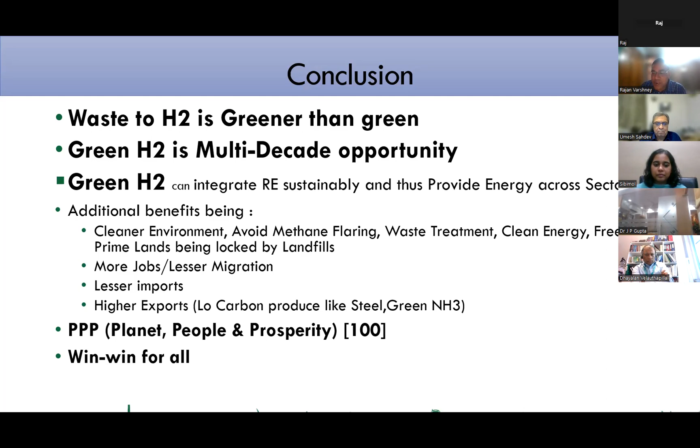It is a 100% profitable way to do it, so it is a win-win for all. Thank you, I'm available for questions.